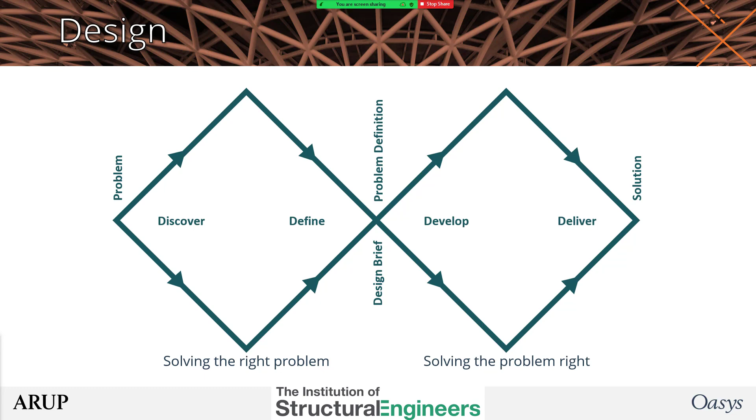Now, the Design Council put it a slightly different way - see above about there being more than one way to do something. They use the design double diamond. Note that in the discovery and development phases, the design broadens - this is when you explore what the options can be. Remember, don't close down your options too soon. Then it's in the define and delivery stages that you must refine and concentrate on what the problem is and what the solution is. And even this doesn't take into account the cyclical nature of design.

So let's dig in a little bit deeper on the development phase and the method called parametric design. We all know that layouts are driven by constraints and dimensions. We know too well when the architect changes something, making the scheme a little bit larger or smaller, and then we start all over again. But with parametric design, we can plan for change by encapsulating all those constraints and rules into a geometric computer model - a design led by parameters.

Now, these might be mundane things like the span of a decking slab, or complex like the offset from a curved spline surface. Speaking of which, parametric design started in the aeronautical industry, whereas the first parametric design in the building industry, as far as I'm aware, was Frank Gehry's Guggenheim Museum in Bilbao, Spain, which opened way back in 1997.

Parametric design back in the 90s was on supercomputers running software designed for making fighter jets. Today, it's a much simpler CAD program like Rhino, as you see here, running what I like to call a plate of spaghetti script, or Grasshopper, which then generates the geometry. Then with various sliders to control things, and export to FE for analysis, CAD for detail and documentation, and so on. Which, of course, brings us to BIM.

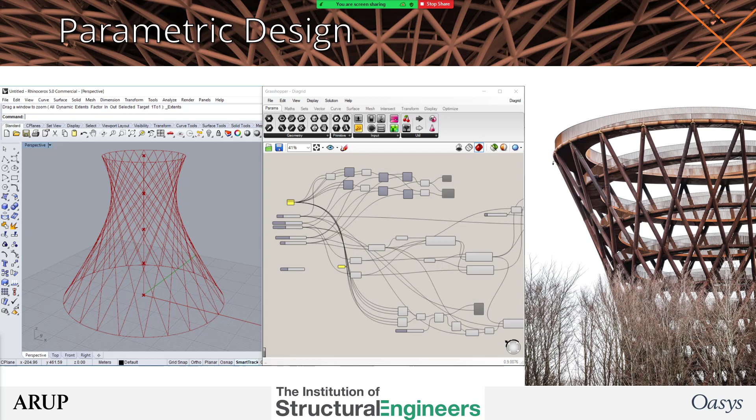BIM, building information modeling, used to be about neutral file formats, but we've moved on from there. Now it's all about digital workflows - information flowing automatically from one program to the next. Though of course the underlying principle of data reuse remains the same.

Now, to the validation of your designs, of course, using finite element analysis. This was used back in the 1950s for aircraft again, and in the 1960s on buildings. As far as I know, the first structural engineering use was by Arup on the Sydney Opera House. But if you know of any other examples, I'll be very interested to know.

Now, FE analysis books I find a little bit frustrating. They tend to focus just on the maths of the methods, which is great if you want to write your own program, but the majority of engineers I know just want to use a commercial program. So my aim here was to teach how to make the best use of models - a little bit of maths thrown in because it can be interesting, and it can be useful to have some understanding of the methods behind the analysis.

As an aside, I think in universities FE maths is more likely to be taught than modelling, because having done marking, maths is a lot easier than marking modelling. Modelling is an art, and therefore there is no one right way of doing it. Rather, there are better ways and there are worse ways, and of course, occasionally completely wrong ways.

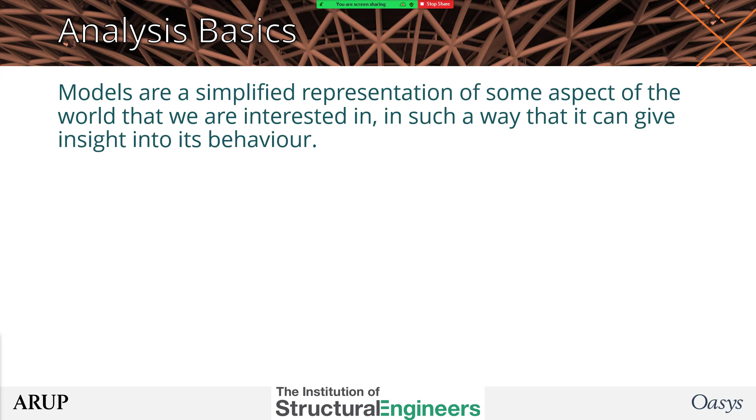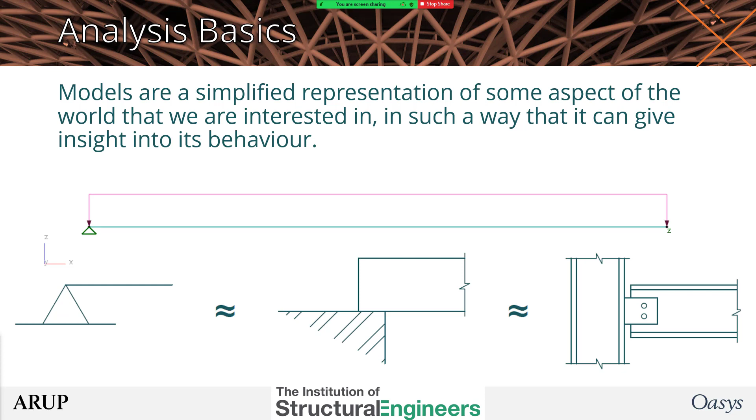So, what is a model? It's a simplification of reality, not the real thing. For example, this is not a beam, and the supports don't totally represent everything about the real connection, but they are close enough for engineering.

The model is a simplification of reality, not reality. Therefore, all models are wrong. This is important to remember. A model is not the complete representation of the structure. It is not possible to build a totally realistic model and test it with everything the real structure will experience

over its service life. The closest we might get is to build a real structure out of steel and concrete and so on, test it to destruction, and rebuild it. But even this model won't be 100% accurate, because tolerances will change, steel and concrete sections will be slightly different, the framework won't be quite plumb in the same way, and wind, snow, and earthquakes will not be exactly the same. We don't know what will happen over the next 50 years and so on.

It is not possible to do it perfectly, but the art of engineering is to get answers that are close enough.

So consider the stool paradox, which you may have come across. If you sit on a three-legged stool, your weight will be carried approximately equally down each leg. The design load on each leg is therefore your weight divided by 3.

But if you sit on a 4-legged stool, will the design load now be equally divided by 4? Well, no, because the stool will not be perfectly built, and the floor it sits on won't be perfectly flat, so only 2 or 3 legs will actually be fully in contact. Effectively, your weight will be carried by 2 legs, meaning the design load is now your weight divided by 2, an increase of 50% thanks to the addition of an extra leg.

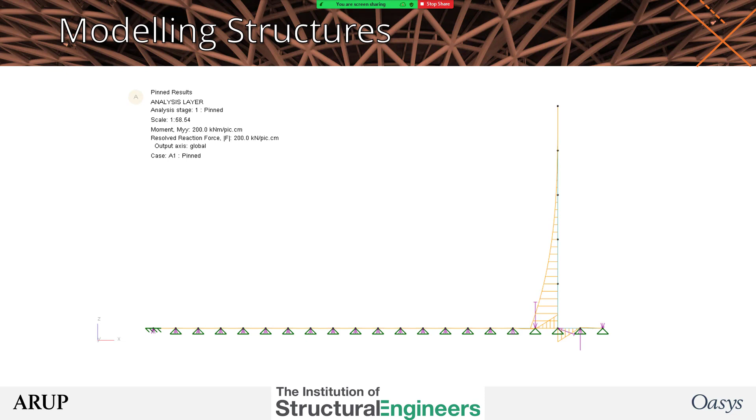As you can see there, as I discovered as a graduate, the bending moments go completely haywire if you use infinitely stiff supports in these situations. Now, moment redistribution—some of that does happen because of plasticity, but a lot will also happen because of the error in assuming that the supports are infinitely stiff.

Model the ground or support with springs of an appropriate stiffness, and you'll see that sagging increases, hogging reduces. Usually, in multi-span structures, things can get strange, but this redistribution happens here purely by putting spring supports in.

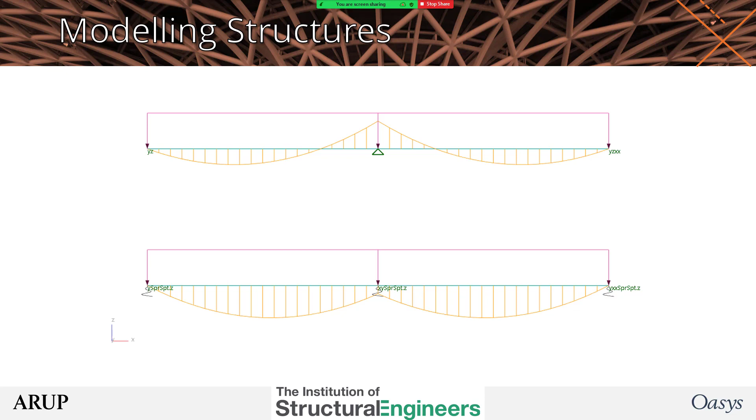Now, do we really know how stiff the beam will be? How stiff will the ground be? Well, this is only approximate. How confident can we be in the results?

Take an example, a steel beam rolled in a factory to European tolerance standards. Its cross-sectional area can vary by up to 4%, and its bending stiffness up to round about 10%, depending on the beam size. This means that even with a factory-made steel beam, there is no point in calculating deflections beyond two significant figures.

Concrete beam stiffnesses vary even more, from both the tolerances and effects of cracking as they carry a load and so on.

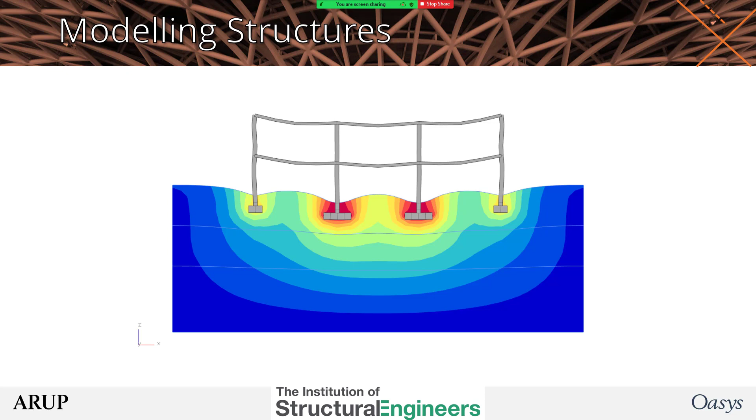Now, FEA models are analogues of the real structure.

1D elements are great when the stress flows are essentially one-dimensional, where one dimension, the length, is considerably more than the other two. Then we have two-dimensional elements, which are suitable when the stresses move in two directions, so thickness is usually considerably less than the other two dimensions.

And then we have 3D elements. Well, I'm sure you can guess where they're used.

Now, these analogies break down when the stress flow directions change, and at the connections between the beam, slab and column. For this reason, a simple overall model is great for informing you of the overall behavior of the structure, but you'll need a more detailed model of a part of the structure if you want to understand exactly what's going on in that location. But you would definitely not want to model the whole structure in the detail required for a connection. Appropriate modeling.

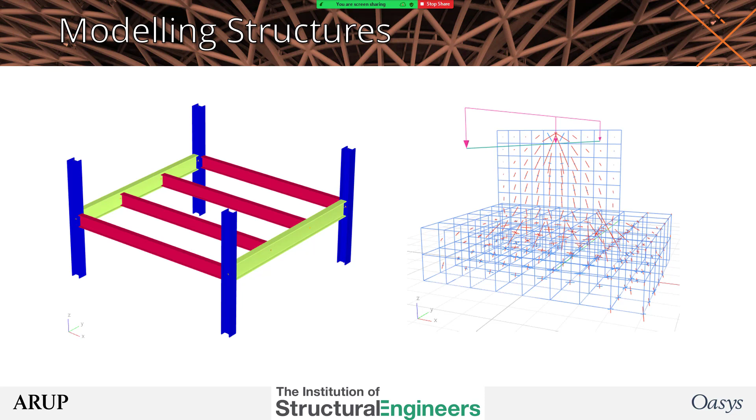So what does make a good model? Well, it needs to be as accurate as necessary. So do a sensitivity check, vary the stiffnesses, the dimensions, do a p-delta or non-linear analysis. Are the results still close enough?

It's got to be as realistic as appropriate. Remember that increased realism is subject to diminishing returns. Stop when it's not worth continuing.

It needs to be as simple as possible, but simplicity comes with experience. My first FE model took over 24 hours to run back on the University mainframe. Well, straight speaking, it took 24 hours before it crashed. Today, I would achieve the same results in a model with perhaps 1% of the number of elements and considerably less crashing.

The model has to be useful and relevant. Does the model give you the answers that you need? For example, static and dynamic analyses often require different models.

The essential question you need to ask yourself is, what is the question you are trying to answer? Then make sure that your model is set up to achieve that.

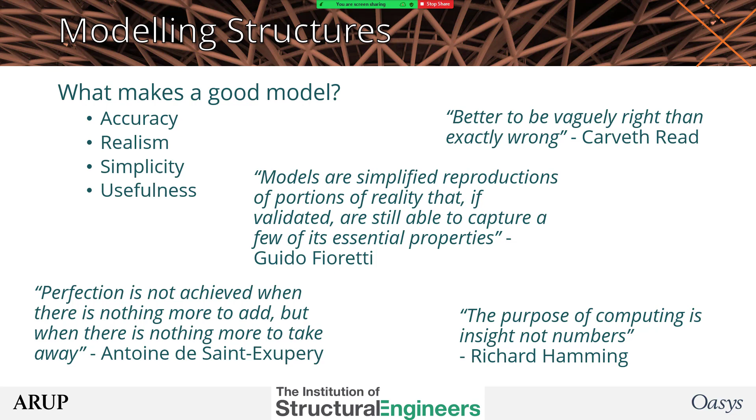Now, it would not be a book looking at FE if it didn't have some explanation of the maths behind the methods, but we've essentially got five minutes to cover methods on a subject which will normally take up entire textbooks. So I'm going to keep it quick, simple and useful.

Now, here we have a simple structure, and we know that when we apply a force to a structure, its deformation, called U, is proportional to the external force, F, and inversely proportional to the stiffness, which we call K. Or stiffness times deflection equals force.

Now, if you look at this bar element, it, for simplicity, only has axial stiffness, and you'll note that it has stiffness in the horizontal direction, or the x direction here, and nothing in the y direction. If we apply a force in the vertical y direction, it will give no resistance whatsoever.

Now, strictly speaking, an element will have forces applied to both ends, and that will cause both ends to move. And again, keeping it simple, we're looking at only the forces and displacements in line with the elements.

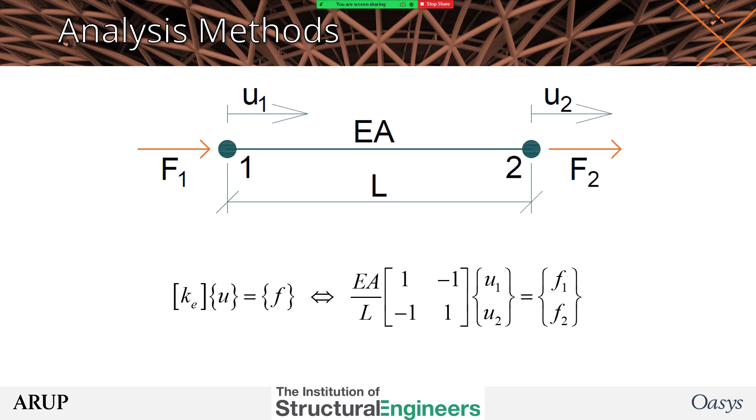It can be useful to write all the equations in a matrix form, so we can then use matrix maths to find all the displacements and all the forces. Now we combine all the individual element stiffness matrices together to form a global stiffness matrix. And again, for simplicity, I've shown each one separately, but they'll actually overlap wherever they have a shared node.

And again, for simplicity, we can write this as Ku equals F. Now, we need to find the displacements, but you cannot divide by a matrix. Instead, we need to multiply both sides by the inverse of the stiffness matrix. And no, I'm not going to tell you how to do that here.

And it's not important. Once we have found the nodal displacements, we can then find the forces, and these include interfaces and reactions. And from the nodal displacements, we find the stresses and strains and so on. And that, ignoring a whole host of details, is simply how finite element analysis works.

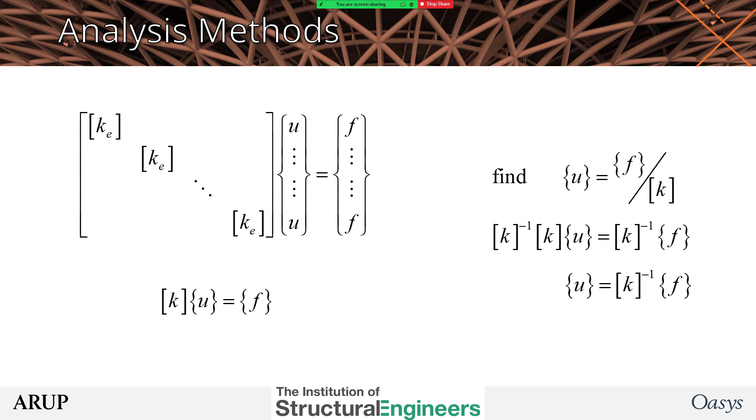Now, in the book, I'll build on from there. So P-delta analysis includes the geometric stiffness matrix, which accounts for the way that tensions can increase stiffness and compressions can decrease it. You'll note that there will be some forces where the element and the geometric stiffnesses cancel out, causing the P-delta analysis to fail. In buckling analysis, we're actually looking for those failure loads which cause the collapse.

And we'll then get the multiplier on the applied load which caused the collapse, and the deflection is the buckling shape. And we find this using eigenvalue methods.

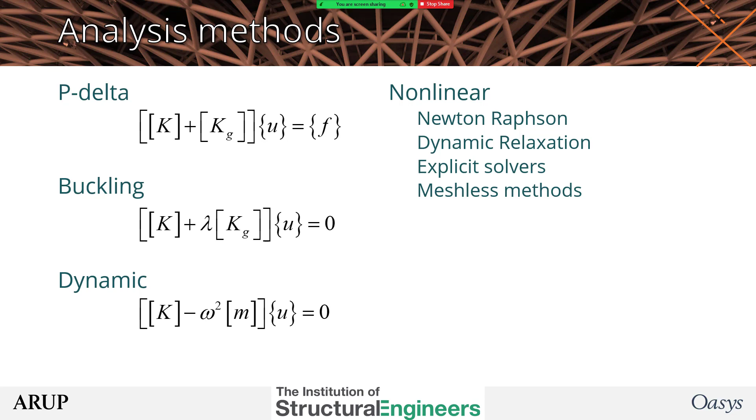Errors: Hartford Civic Centre, Sleipner oil rig, CTV building Christchurch. These are just 3 structural collapses caused by bad FE analysis. The first 2 thankfully had no casualties, but 115 innocent people died in the 2011 Christchurch earthquake, all in that one building. And we possibly might add in the Florida University footbridge to this list.

As I said earlier, all models are wrong, but some are useful. So how can you make sure that your models are useful? FEA stands for finite element analysis, but also finite element approximation.

No digital computer can exactly represent real numbers. 3.14 is approximately equal to pi, but may or may not be close enough depending on what you're calculating. The maths of FE analysis is to find the solution of a whole bunch of simultaneous equations. If we're only trying to find the intersection of 2 lines using simultaneous equations, the answer is definite. But as we add in more lines and more lines, the intersection gets more and more uncertain.

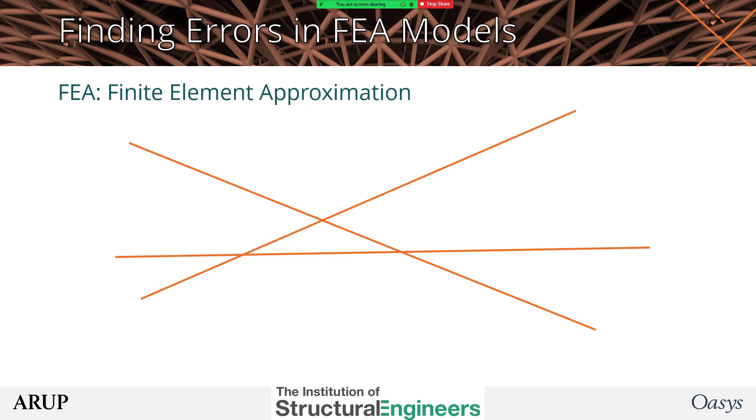Statically indeterminate structures are even more uncertain. So how do we get the best results from a model?

Well, validation. This is ensuring that the model is valid. Does it answer the right question and in the right way? Is it realistic? Does it include important checks and details like voids, stability?

Is the modelling appropriate? The Hartford Civic Centre model was invalid because it ignores important details, such as the way inbuilt connections induced large amounts of torsion in the members, which had virtually no torsion capacity. Their analysis approach was also invalid as they did not check for buckling, never mind torsional buckling, which was actually the cause of the collapse of the structure. They did not ask the right questions.

Okay, and then verification. Verification asks whether the model is giving the right answers, as in errors. One of the best ways of verifying the model is to have a very good idea of what the right answers are, what they look like, whether deflection, the moment, or the shear. If the results do not match up with your expectations, it's usually one of three reasons.

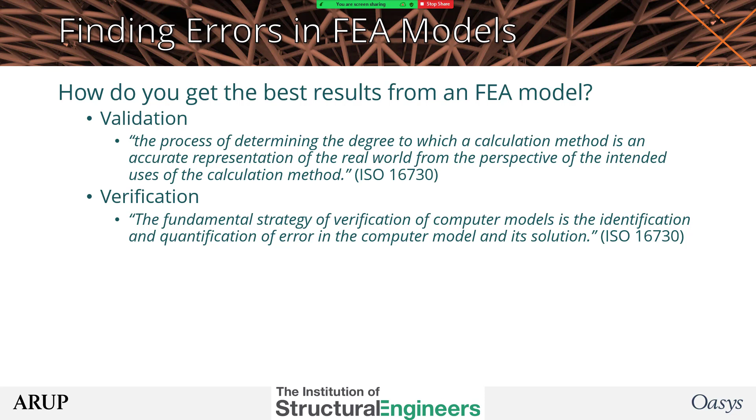Hand calculations are also a great way to start, with an even simpler model and assumptions. Assume a truss as a beam, or a tall building as a cantilever. Then use beam theories to get approximate answers. Sleipner A oil rig sank because a one-line beam shear capacity check was never done.

So, apart from approximations inherent in FE modeling, where do the errors come from? Errors in units. That's possibly the biggest cause of errors, at least the models that I've seen pass my desk. Confusions between newtons and kilonewtons, meters and millimeters, whether in the materials, the sections, the model dimensions, the loads. You can very quickly find yourself out by a factor of 1,000 or even 1,000,000.

Over-restraining your model will cause errors. I remember one model where the engineer put pinned restraints at the ends of all his beams rather than pinned releases, and then complained that the columns had zero load in them.

Lack of restraints can also lead to unstable models. Just because you do not have forces in a particular direction does not mean you do not need restraint in that direction. A zero stiffness will always stop the analysis, or should do, whether on the model as a whole or an unconnected element.

Torsion is often forgotten, but it can be crucial. Forgetting it was a dominant factor in both the CTV and Hartford Civic Centre collapses.

Inappropriate meshing can reduce accuracy, but it can be especially crucial on buckling analysis models. Meshing was also an important factor in the Sleipner oil rig failure. As a tip, keep halving the mesh size until the results stabilize.

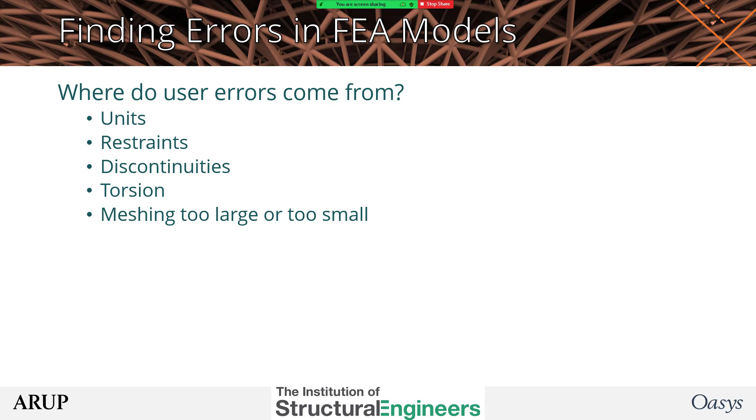Large deflections will need a non-linear analysis. Note also, if it's a non-linear analysis, you must not combine or multiply analysis results. You have to make sure you analyze factor combinations to get the right results. And of course, there is whatever it is you've forgotten.

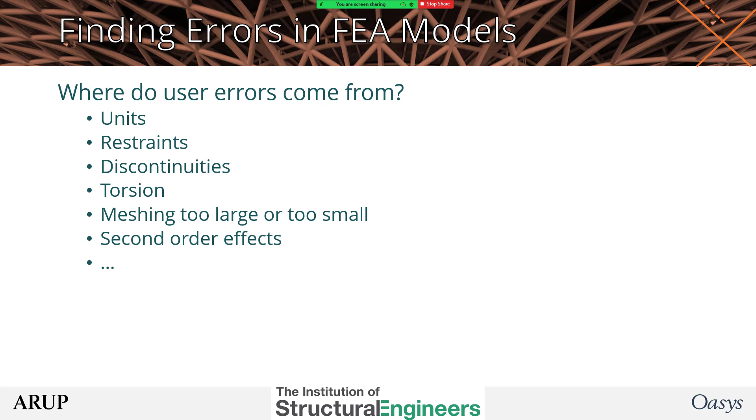Now you've got your model working, and it's working well. Let's see how about making it work even better.

Optimization, I know, is a favourite subject of mine, but I think it's something almost all engineers are interested in, whether it's finding the lightest beam or making a bridge span several kilometres over the sea, just carrying its self-weight.

And now, at last, we have the drive towards zero carbon construction from both industry and clients. The construction industry contributes, well, I've seen various figures, from 8% to 30% of the world's greenhouse gases. The main emissions used to come from the service life of buildings, heating and cooling, but improved insulation efficiencies have greatly reduced those. Now it is the structure that is a major source of emissions, and we need to do our bit by building more efficiently. I think optimization is one of the main tools for that.

But I also hear many opinions as to what optimization actually is. In its simplest terms, it is just minimizing the cost of something in the design, subject to various constraints. I'm not sure if the standard formula here is actually useful, but it seems to be a law that all text on optimization must include the formula. So here it is. But what does this mean? Put another way, we are looking for the best solution amongst a set of feasible solutions. But it is up to you to decide what that range of feasible or possible solutions is.

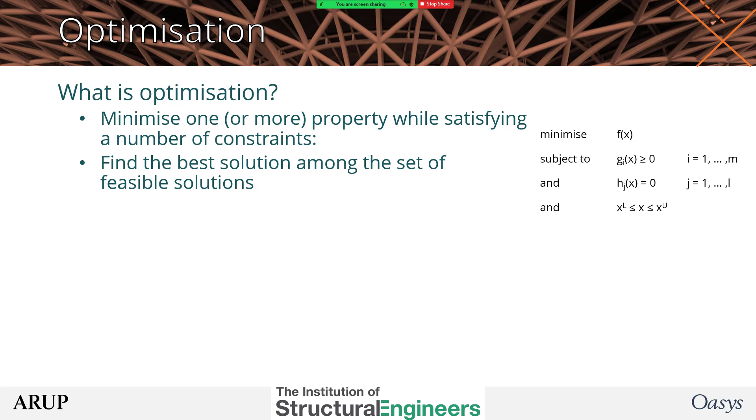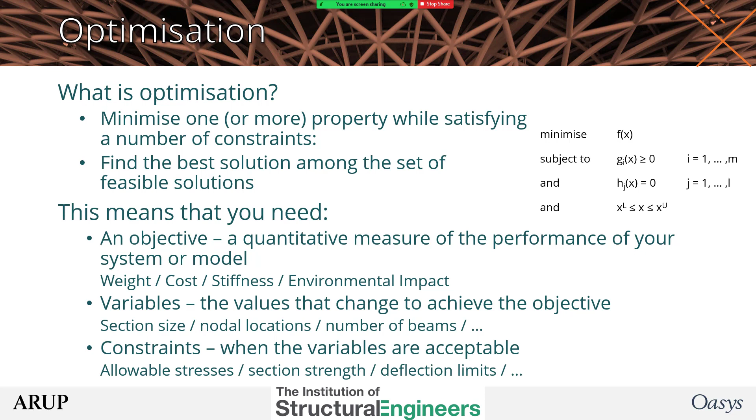We need to computerize the optimization. To do that, we need a cost function, a way of measuring just how optimum or efficient a solution actually is. And you need to decide what variables you are going to explore to find that optimum, as long as you know what is and is not acceptable - for example, the structure cannot fail and must not deflect too much. And if you decide you're going to minimize for cost, weight, construction time, or environmental impact of the structure, how are you going to go about doing that?

There are three main categories of optimization. There's section optimization, determining the best section size, which is perhaps the simplest option but has the least effect on the overall cost of the structure. Then there is shape optimization, which looks at the shape of the building, the truss, or the section. And then there's topology optimization, which looks at the scheme as a whole - span directions, numbers of columns, materials, and so on. Topology has the largest effect on the end result, so it should actually be done first.

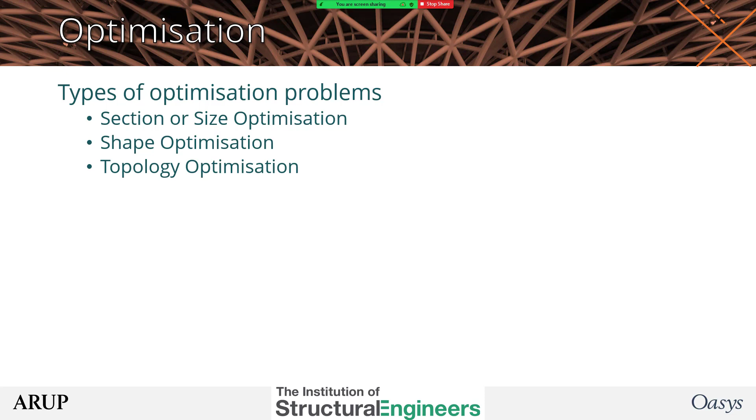As an example, in 2012 the incoming IStructE president, John Nolan, gave in his inaugural address a simple and very powerful example of topology optimization on a simple single-story industrial building.

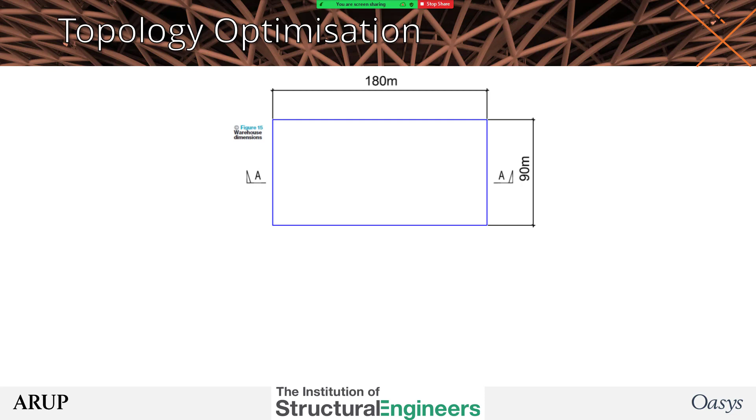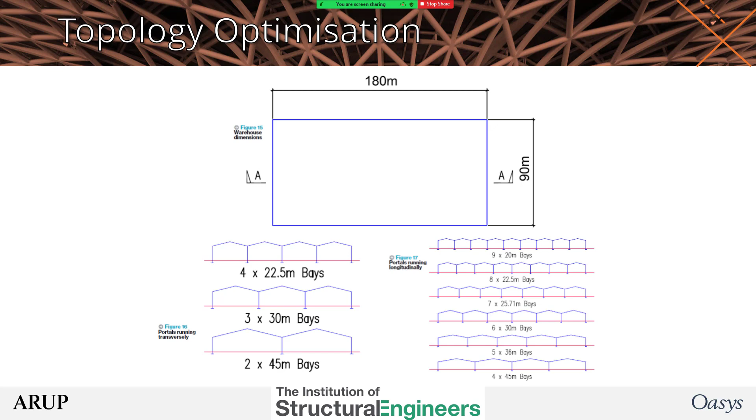This is a portal frame. But do we span the roofs in the short direction? And if so, is it best to have 2, 3, 4, or more bays? If we span in the long direction, we have 4 up to 9 bays or so. Do we put columns everywhere, or do we use hit and miss layouts? Should we use moment bases to reduce the frame size, but which then require larger foundations? Even with this simple example, we're already dealing with over 100 layout options.

Now, I've often wondered over the years, between things like trusses, what is the most efficient truss shape? Pratt's, Warren's, Fink's, Howe. What I didn't realise at the time was an Australian engineer called Michell found the answer about 100 years ago.

If they haven't to date, they may be mostly known to tall building specialists and so on, but I would expect that these truss forms, these Michell trusses, will be seen a lot more in future.

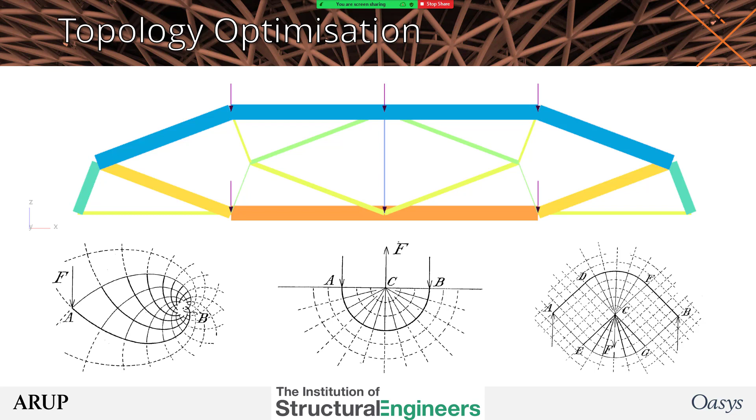Now, talk about topology and shape. These can often be confused. Indeed, the boundaries between them can be fuzzy. So, here are 3 examples.

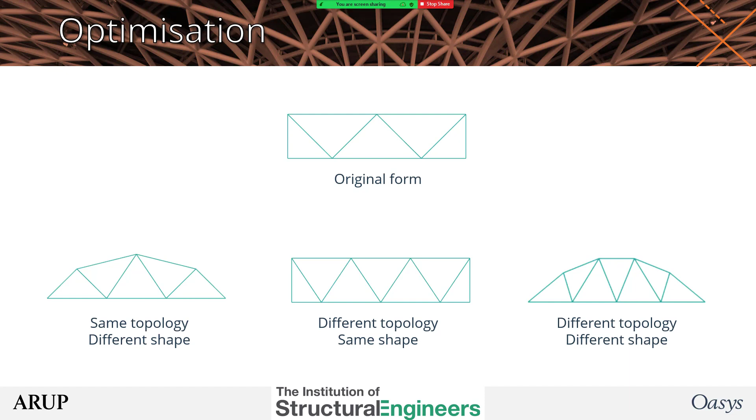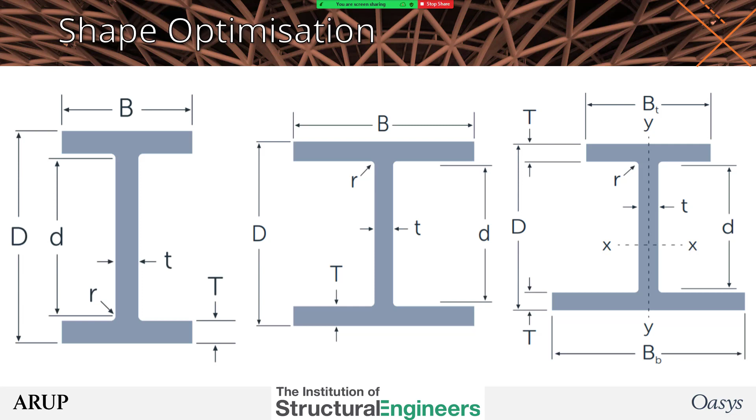Shape optimization is getting the most from the structure by adjusting the location of the truss nodes, or the section corners, or the thicknesses, or the ridge heights, and so on, to get the most efficient answer. I-beams, for example, are generally recognized as being very efficient, but even they come in a variety of shapes, depending on whether they're used for carrying bending, or compression, or composite action.

Shape optimization is also essential if you're designing a compression-only or a tension-only structure, as the right shape should minimize the chance of buckling or wrinkles, as is appropriate.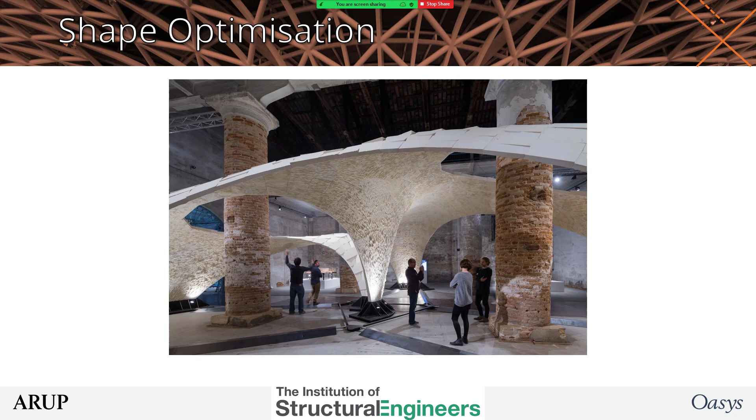And then finally, section optimization, which is something I think we're probably all familiar with, but it can still throw up some surprising problems. Optimizing a section with a single statically determinate beam is pretty straightforward.

But when stiffnesses interact, then it gets a lot more complex, even with this simple cruciform beam: two beams, same span, joined in the middle, with central point loads. Even here, there are 3 principal optimum solutions. Actually, there are 4 more of these, but they're not quite so good.

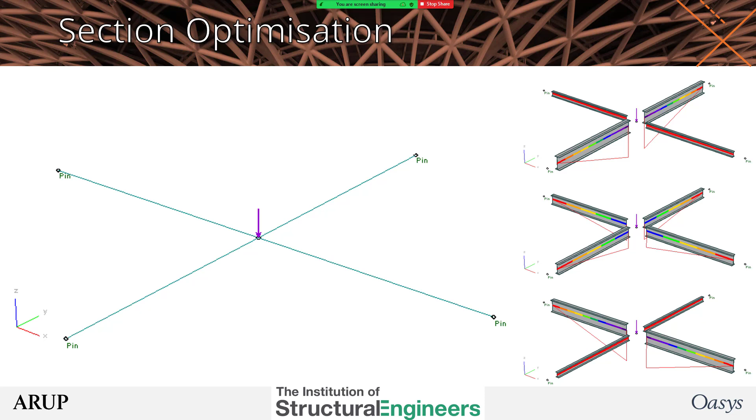If you're looking at a more complex structure, which, let's face it, most of them are - two-way spanning verticals, trusses, space frames, and so on - it can take a lot of iterations before you determine what the most efficient set of sections are.

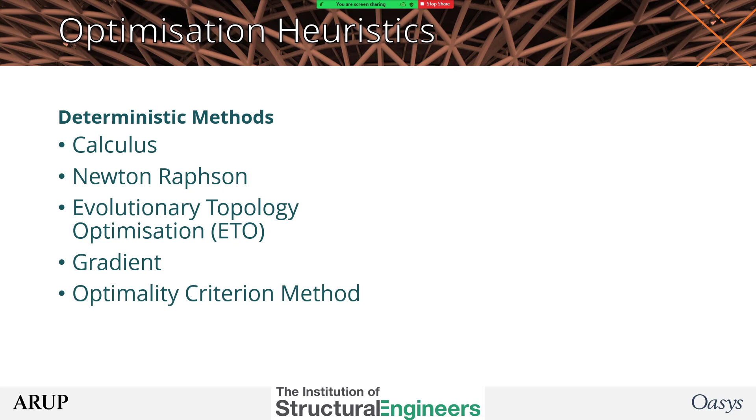Now, I don't have time to cover everything concerning optimization here. I have been known to talk about it for several hours, and the book itself contains 2 whole chapters on the subject. As a teaser, here is a list of the principal heuristics or methods for optimizing a structure, or indeed for any other engineering problem.

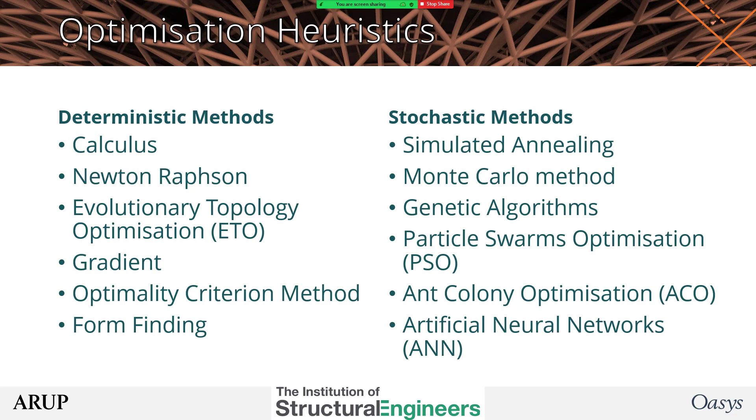Now getting on to the state-of-the-art, cutting-edge artificial intelligence and machine learning. The concept of artificial intelligence has been with us since the dawn of the computing age. The term itself was invented back in 1955 at the Dartmouth research project in the US, where a number of eminent mathematicians and scientists gathered to work out how to get a machine to simulate thought.

The expectation was if a carefully selected group of eminent scientists worked together for a summer, they should be able to make significant progress. Now, 70 years later, we know that they were rather optimistic, to say the least. But from their starting point, there have been many useful techniques and methods that have arisen, even if none of them have actually really come close to simulating thought.

And another technique, natural language processing, is now found in most homes and pockets. So a machine learning system will parse speech sounds into words. Natural language processing groups the words into sentences, works out which parts are nouns, verbs and adjectives, instructions or questions. It'll then try to find the answer for you from the internet, or play the music of choice, or do something completely random.

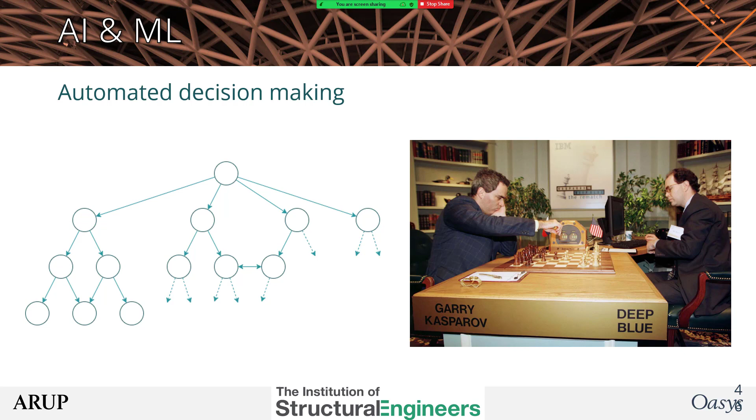And then we have neural networks. These have been around since the 1960s, initially very unsuccessful. Now, with faster processors, powerful training algorithms, and a huge amount of data supplied by the internet, they are now the dominant machine learning methods. These are inspired by how neurons in the brain connect together, collating data and enabling pattern recognition.

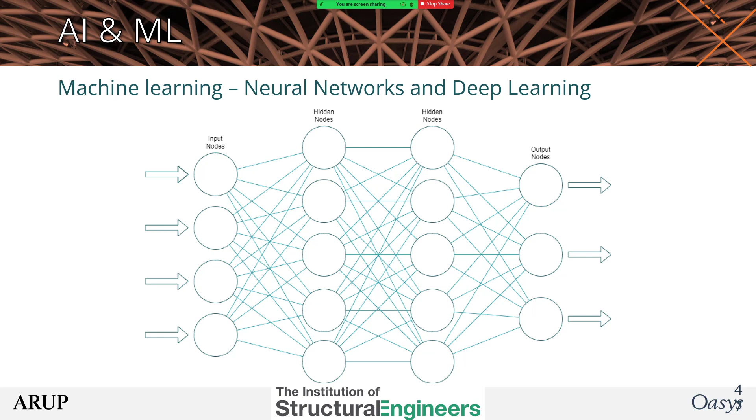Artificial neural networks work by taking numerical data through a number of inputs, multiplying and adding them together multiple times so the output indicates the right answer. When they're being trained, if the answer is correct, then the links which gave this answer strengthen. If the answer is wrong, the links are weakened. The neural network is thus trained over thousands of iterations until it consistently, or at least generally, gives the right answers.

Computing has made huge changes in my lifetime so far, and I foresee even more coming. AI and machine learning will increase their presence, but I think the major change will be due to climate change and our efforts to mitigate that.

So, yeah, the main thing we must do is work out how to build using less material. We must use less, we must also build less and refurbish more, only doing new builds when that is not an option.

Optimization is going to be a significant tool for us in future, whether automatically exploring the structural topology, shape, or sections. And I know there is a fear that optimization could reduce factors of safety, but I think you'll see that improving the topology and shape of structures will improve efficiency without compromising safety. Certain safety and robustness...